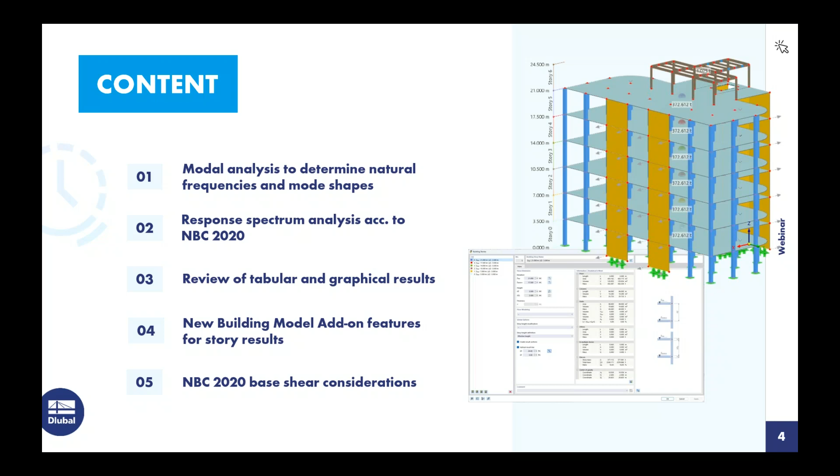So before we begin, I want to discuss the NBC 2020 earthquake methods of analysis that are given in Article 4.1.8.7. So we do have the equivalent static force procedure that is provided in 4.1.8.11, and this is certainly a simplified approach for seismic design. Now, this can be applied for buildings that are of seismic category SC1 or SC2, given in Table 4.1.8.5-B.

It also can be applied to regular structures with a height less than 60 meters and a fundamental lateral period less than 2 seconds. We can also apply this simplified approach for irregular structures, and we would refer to Table 4.1.8.6 to see what categorizes a structure as irregular. But the height must be less than 20 meters, and that fundamental lateral period must be less than 0.5 seconds.

Then we have the dynamic analysis procedure in 4.1.8.12, and this includes the response spectrum method, the time history method, or the nonlinear dynamic analysis. And this should really be applied to all structures that do not satisfy the simplified requirements set forth in Article 4.1.8.7. For today, we'll move forward with the response spectrum method for our structure.

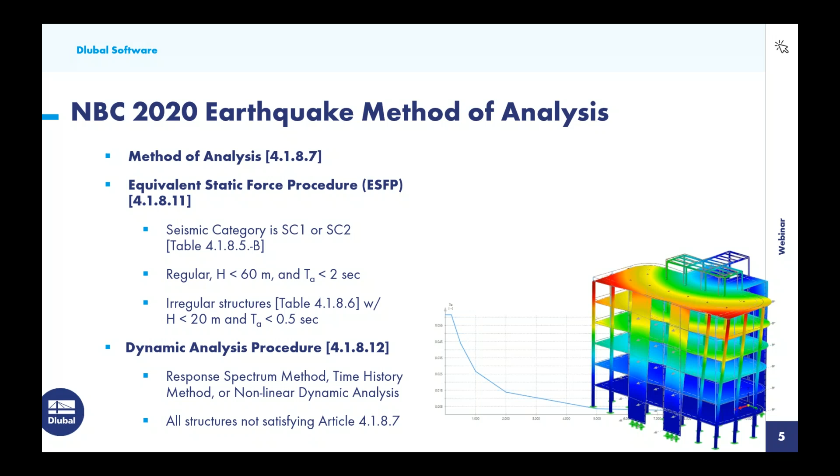So we'll begin in RFEM here, where I have already modeled our multi-level story structure. So we'll quickly go over a bit of the model input as shown over here in the RFEM 6 navigator on the left. So we can see our input materials, and a majority of the structure is defined here as a concrete material with a compressive strength of 40 MPa. But we also have a small steel structure up at the roof level here with a material of A992 steel.

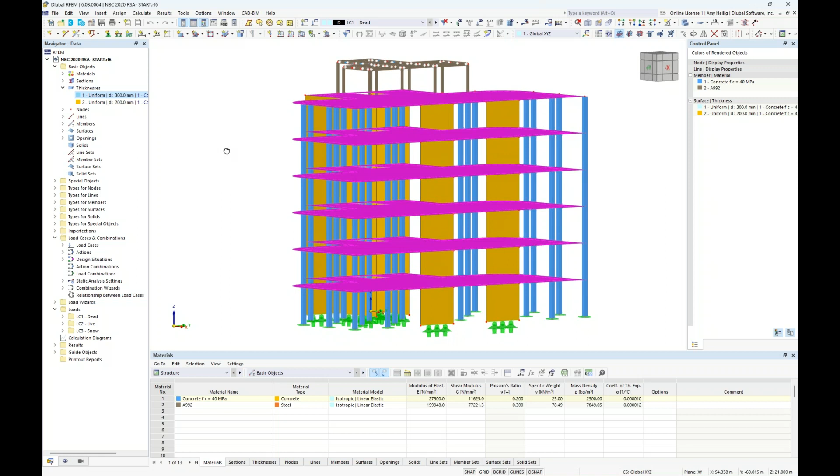As far as our cross sections, you'll notice that our concrete columns that are spanning between floors are just going to be square 350 millimeter by 350 millimeter concrete rectangular sections. And then as far as our steel members, we have several W shapes defined directly from the RFEM 6 CSA library. And finally, we have the thicknesses defined of our surfaces. So this would include our floor slabs here, which are defined with a 300 millimeter thickness. And then we have the thickness of all of our shear walls, which are going to be defined with a slightly smaller thickness of 200 millimeters.

So that's just a basic overview of the structure, but we would also like to take a quick look at the applied loading that, again, I've already added to this particular model. So within our dropdown, we have three simple load cases, all gravity loads. The first is going to be our dead load, and this is going to be a surface area load of 3.5 kilonewtons per meter squared applied at every level.

We also have a live load, with a modified magnitude here of 2 kilonewtons per meter squared, again applied at every floor level. And finally, we have just a general snow load at the top level here of 1.5 kilonewtons per meter squared. So now that we have reviewed the overall structure and the loading, we want to move forward now with our modal analysis.

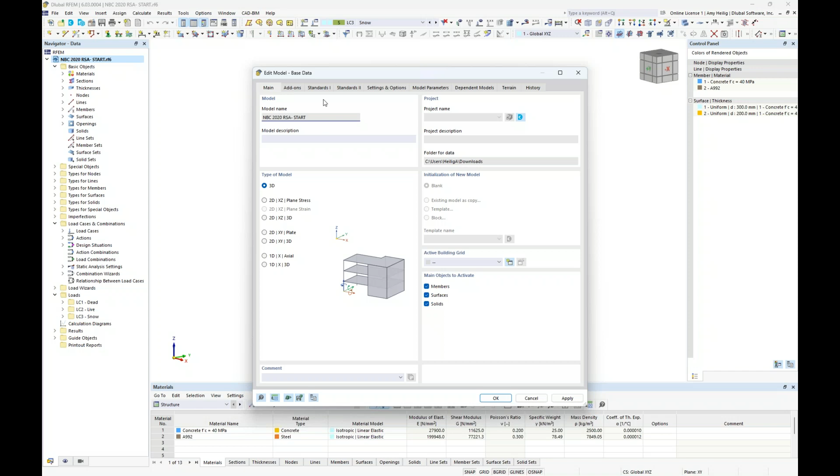So we want to right-click on the model name here in the Project Navigator to visit what's called the Base Data dialog box. And this dialog box would be presented to you when you first create a new model within RFEM. But on the second tab are all of our optional add-ons.

So to quickly explain the configuration of RFEM, the base program itself allows us to fully model the structure, including all of the materials and cross sections from the library. We can apply loads and run a basic static analysis.

But the minute we want to move forward with design according to the various standards, we would activate one of these add-ons, for example, concrete design, steel design, timber design, and so on. And in particular, today, we want to activate our dynamic analysis add-ons, and we'll begin with the modal analysis.

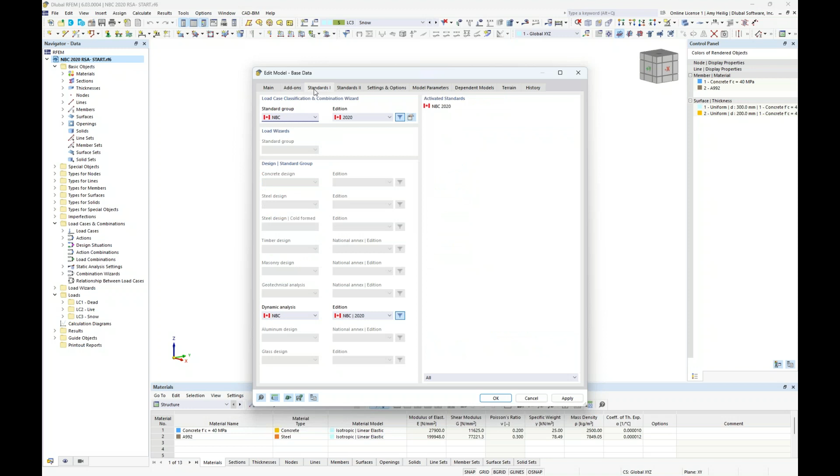So on the third tab, we will generate our load combinations automatically according to the NBC 2020, but we see all of the relevant international standards that are available in the base program as well. And because we have activated now that dynamic analysis add-on, we will go ahead and reference the NBC 2020 here.

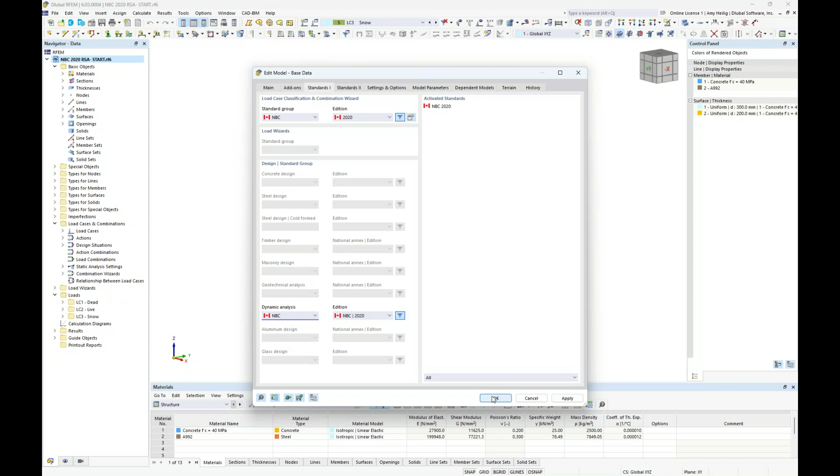So once we have activated that add-on, we will go back into the program and we want to visit our load cases and combinations dialog box. Well, we can immediately pull that up here by editing the active load case. And again, under the load cases tab, we see those 3 simple load cases that we just reviewed, dead, live, and snow, but we're going to create a 4th load case. And the load case name is going to be modal analysis.

Now, because we have activated that add-on, you will notice here that within the dropdown, we now have a new analysis type called modal analysis. And this is only available because we have activated that add-on. So you'll also see a lot of these settings immediately modify in comparison to the static analysis.

The first thing to take a look at is the modal analysis settings. So we'll go into the edit dialog box here and we have a couple default options. The first input is the method for determining the number of modes. So this is by default set to user defined, where we can directly put in the number of mode shapes we would like to solve for. And for today, I'm going to increase this to 10, but you can solve for 10, 20, 50, 100 different modes if you prefer.

The alternative method in this dropdown is automatic to reach a maximum natural frequency. So you'll notice that we can input in the maximum natural frequency and the program will determine the number of modes needed to reach that particular value.

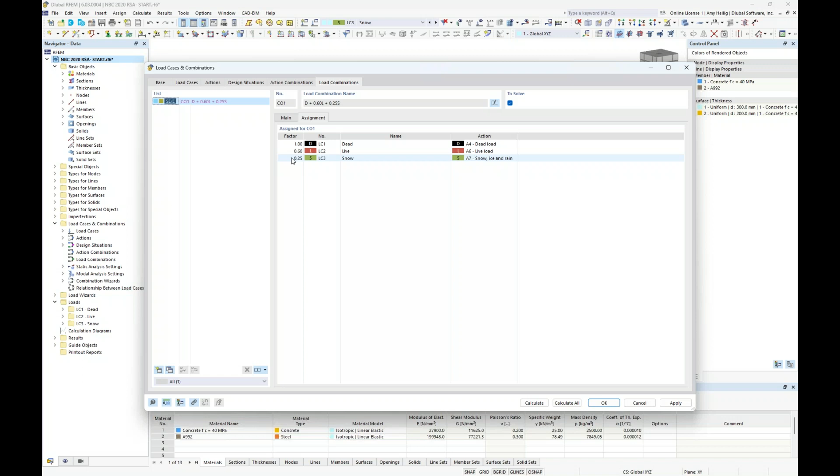And now when we jump to the load combinations, we will see all three load cases considered with the relevant factors directly from the NBC. So 100% of the dead, 60% of the live, and 25% of the snow. So jumping back to our load cases and under the modal analysis, we can now use our drop-down box here to select that mass combination. So now these relevant load cases will be converted to mass.

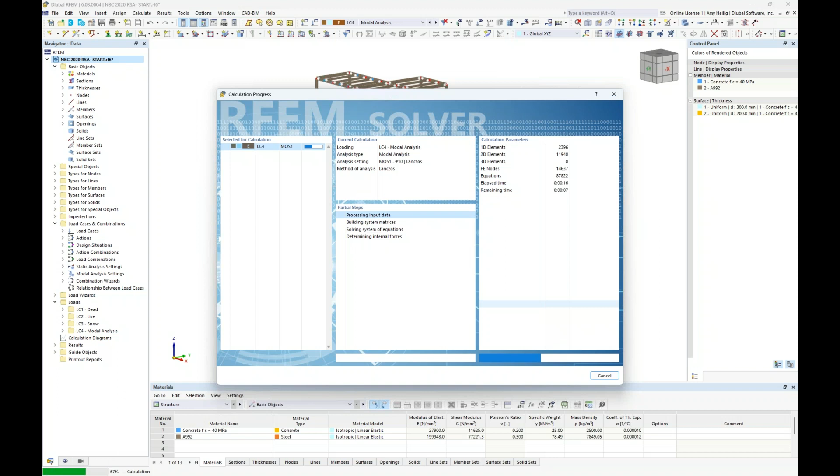Okay, we're now ready to run the calculation, so we can simply hit calculate under this particular load case modal analysis. The program will generate our FE mesh for us. And we are going to calculate a total of 10 different mode shapes. Remember, this is the input that we have input into the particular modal analysis settings. We will also consider the mass conversion of the particular mass combination that we have also set. So when that calculation is done running, we can take a look at our results.

And over on the left, we now have a fourth tab available in the navigator. And within our dropdown, we see here 10 different mode shapes that we can actually cycle through to see the response here of the structure. So currently we're viewing the mode shape, and notice at the very bottom here, we have the ability to scale the mode shapes. Now the default option is set here so that the magnitude of the mode shape vector is set to a value of 1.0. That's why we see a max value here of 1.0.

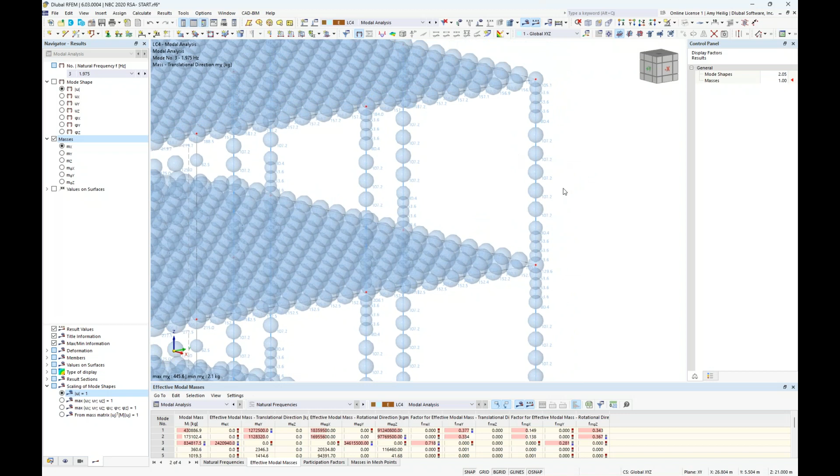But there are some different options we can easily toggle to if we prefer, but most likely we'll be utilizing this first option. So in addition to viewing the mode shape here, you'll also notice the ability to take a look at the masses on the structure used for this modal analysis. And if I zoom in here, we can actually see the mass magnitude at every single FE mesh point that was used in this calculation for our members, our floor slabs, and also our shear walls.

So in addition to the graphical output, we certainly want to visit the tabular output here. So once this calculation is complete, we should also see the ability within our dropdown to jump to the modal analysis add-on to view our results here. And the first tab under the natural frequencies includes those 10 different mode shapes as well. So we can cycle through these by clicking in the table, and notice the graphics will automatically update.

But this allows us to view the angular frequency, the natural frequency, and the natural period of our structure for those 10 different modes. Now, it's really important to also take a look at the effective modal masses. And within this is going to show us our mass participation for each mode shape. Well, we can immediately tell what our dominant modes are here, just based on the most mass participation. So mode shape 1 would be our dominant mode in the Y direction. And we can also view mode shape 3 here, which would be our dominant mode in the X direction.

And down at the bottom of this table, we will actually get a summation here of the mass participation. So in the X direction, we have 72%, and in the Y direction, we have 89%. Well, if we refer to the NBC commentary, and currently only the 2015 is released, we don't have access yet to the 2020, but I would imagine it would say the same thing, in that a 90% mass participation is required for this modal analysis. And we're certainly not reaching that with these 10 different mode shapes here.

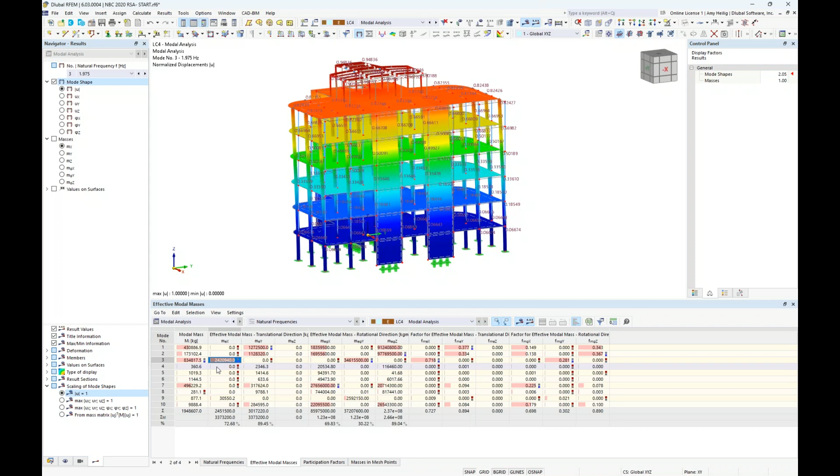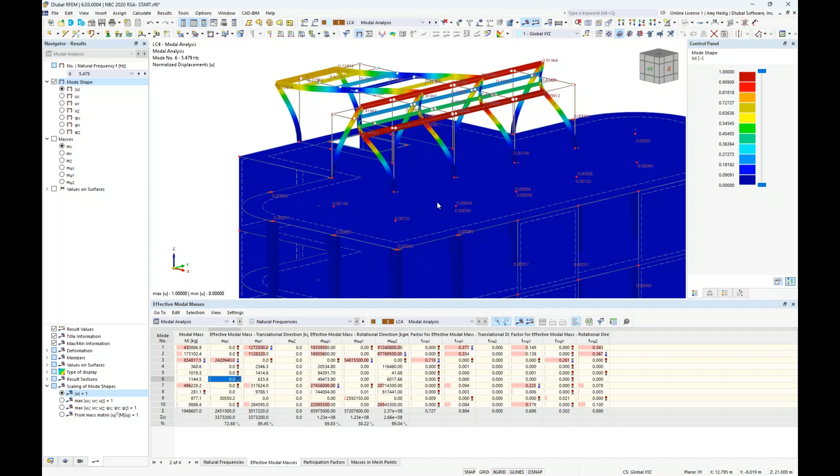Alternatively, if we take a look here at mode shape number 4, for example, you'll notice that really not much is going on with a majority of the structure. Rather, we're seeing a response up here for these smaller steel members only. Same concept with mode shape number 5 and mode shape number 6. So we term these usually as local modes, where again, not much mass participation, but we're seeing very little response for just maybe a few members. So I'd really like to eliminate these local modes in my calculation.

And we're going to go back to the modal analysis here and revisit these settings. Under the Settings tab, remember we have this currently set to no neglection, but what I would like to modify this to is user defined, where I now have an additional third tab here to neglect masses of a particular object that I select within this dropdown. And for today, I'm going to deactivate the masses for all of my steel members located at that top level.

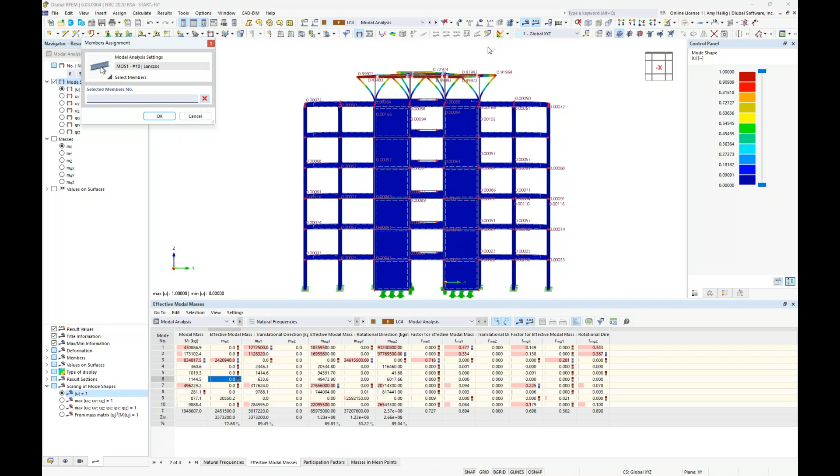And I can graphically select the steel members here. I'll turn off my results. Maybe I turn this into a rendered view by graphically using my selection box here to highlight all of the steel members. Now notice the member numbers are automatically populated. So now we're going to completely neglect the masses for those particular elements. But if we would still like to consider the masses and maybe just redistribute to a different area of the structure, we can do so.

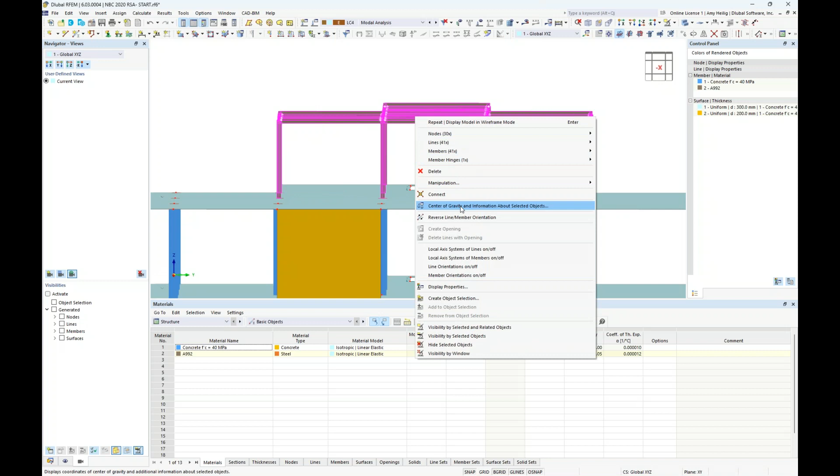So if I highlight all of these same members, again, these steel elements up at the top, I can right click to take advantage of this option here called center of gravity and information about selected objects. And what you will notice is that the program will give me the total mass here of the selected objects, 3.075 tons. Well, I can take this a step further to generate a new node at the center of gravity with the selected objects, and we see that generated here in the background.

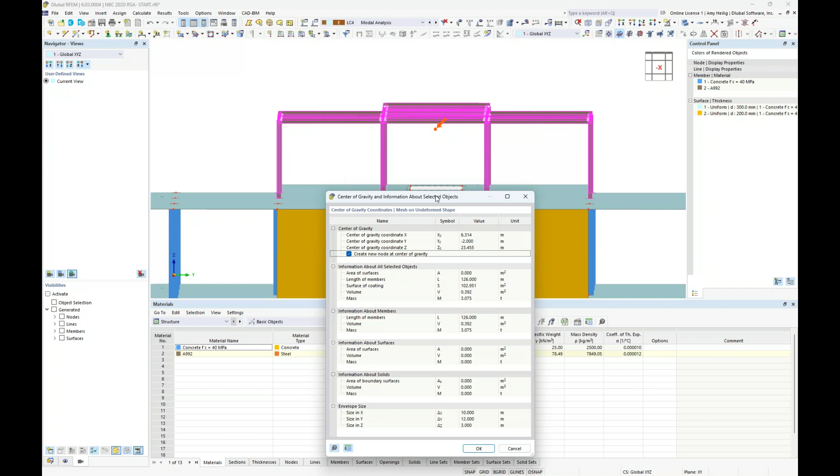So once I've created that additional node, I'm actually going to double click on it because I want to modify the Z elevation here to 21 meters. And by doing so, I have simply moved this node to the top story here of the concrete structure itself.

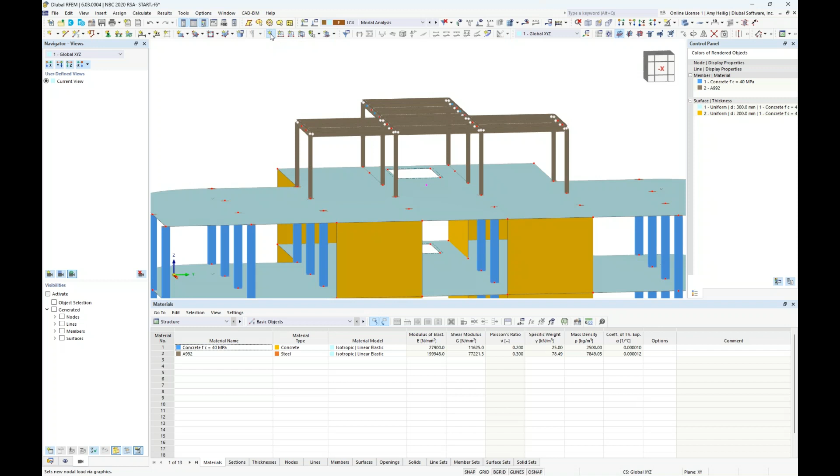Well, now we are going to apply a new nodal load. So I choose my option directly up here in my quick tools up at the top. And instead of the load type set to the standard force, we do have the ability to set a mass load type. And again, taking into consideration the total mass of those selected steel objects, I'm going to simply redistribute it here at 3.075 tons.

And I'm going to apply it to node number 491, or we could graphically select that node. But we do need to make sure that we are under the relevant load case here. So we want to apply that to the dead load case. So when I click OK, the program asks me to delete the results, and we turn this into a rendered view here. And now we see that mass load applied directly to that node, again, at that top slab here

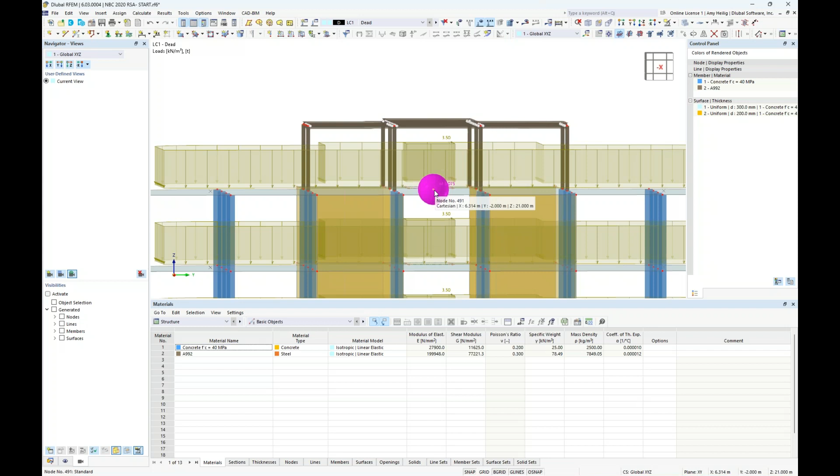of our concrete structure. So we have the ability to apply mass loading as nodal loads, as we just saw, or line loads, member loads, or surface loads to be considered further within the modal analysis directly. So we jump back down here to the modal analysis.

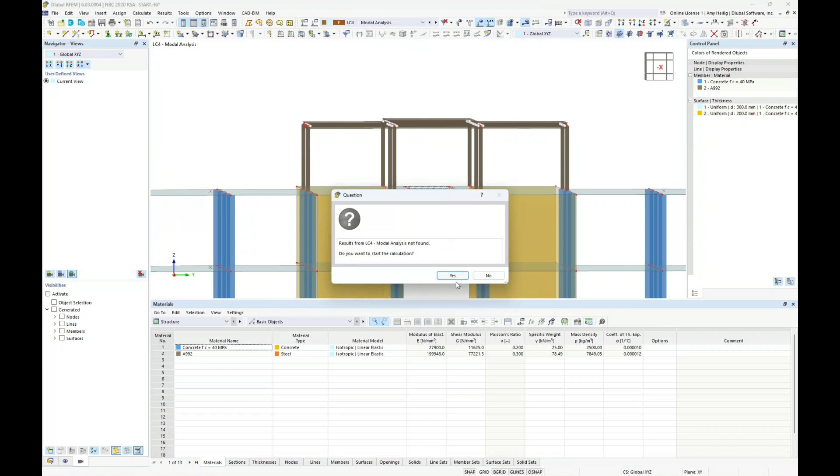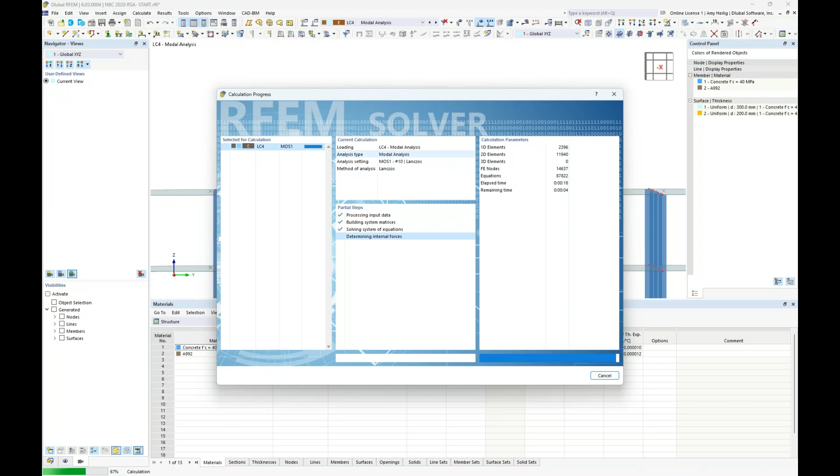We're going to rerun this calculation, and remember now that we are completely neglecting the masses from the steel members, but rather we have now inserted in that single point mass load at the top of the concrete structure to simply redistribute the mass. And our hope is by still solving for 10 different eigenvalues that we see slightly better mass participation.

So once the results are finished here, we can go ahead and zoom out to see the overall structure. We're currently looking at the modal analysis add-on and the effective modal masses tab. And we take a look at the bottom here for the summation of the mass participation. And now we have 96% in the X direction and 96% in the Y.

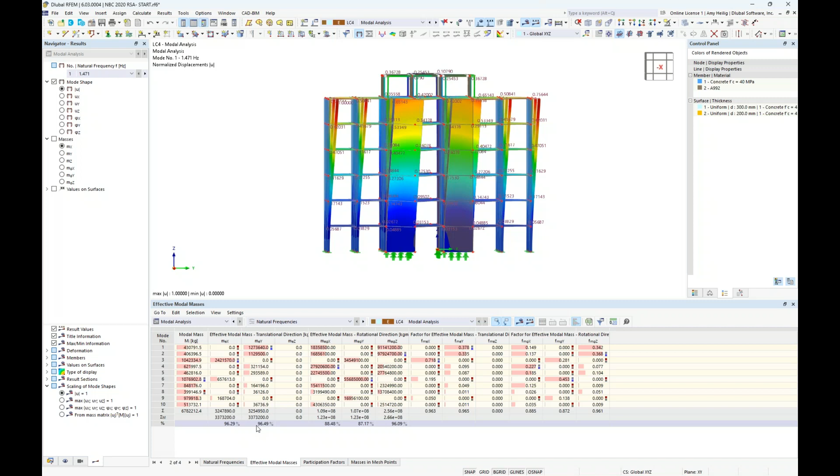So you can see by eliminating those local modes, we don't need to solve for more eigenvalues, but rather what we see here for mode number 4 and mode number 5, that previously had not a whole lot going on for the rest of the structure, actually look quite good now with a response of the overall structure instead.

Okay, so now that our modal analysis is complete, we have met those 90% mass participation requirements set forth by the NBC. We want to move forward with a response spectrum analysis. So we will go back to the navigator and the first tab here to revisit our base data dialog box.

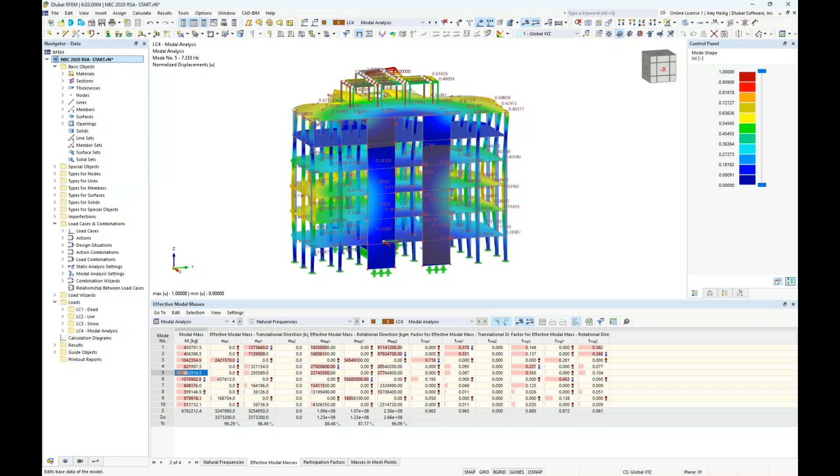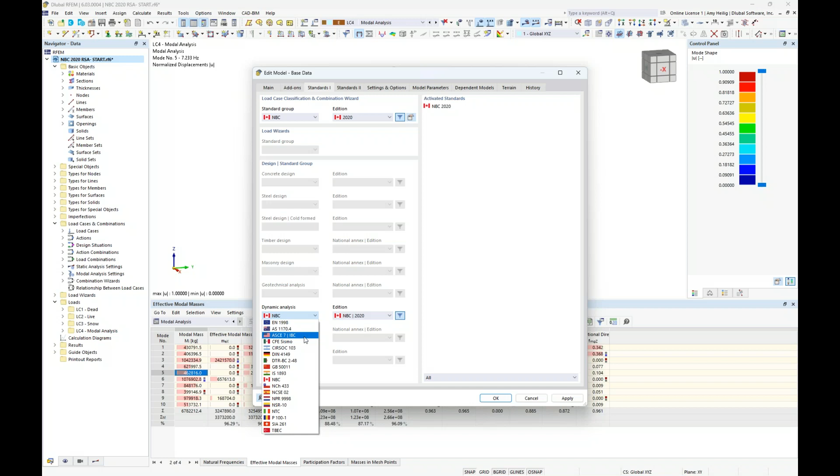And under the add-ons, you can see that we also have the ability to activate our second add-on, response spectrum analysis. And under the standards, we're making no modifications here. We're still running that response spectrum analysis according to the NBC 2020, but I just wanted to point out all of the other international standards that we have available, including the ASCE 7, the Eurocode, and several other international standards.

So we'll go ahead and click OK to get back here within the model where we will revisit our load cases and combinations dialog box. So we will create a fifth load case here, and this one is going to be called RSA for Response Spectrum Analysis Design. Within our drop-down box, we now have a third option available to us, the response spectrum analysis.

Now, before I get into some of these settings here on this first tab, I'm going to go ahead and go over the additional tabs. As far as additional settings, this is actually not something that you need to worry about with a response spectrum analysis. With that dynamic add-on, it's really more relevant for a static analysis. So we'll go ahead and make no changes here.

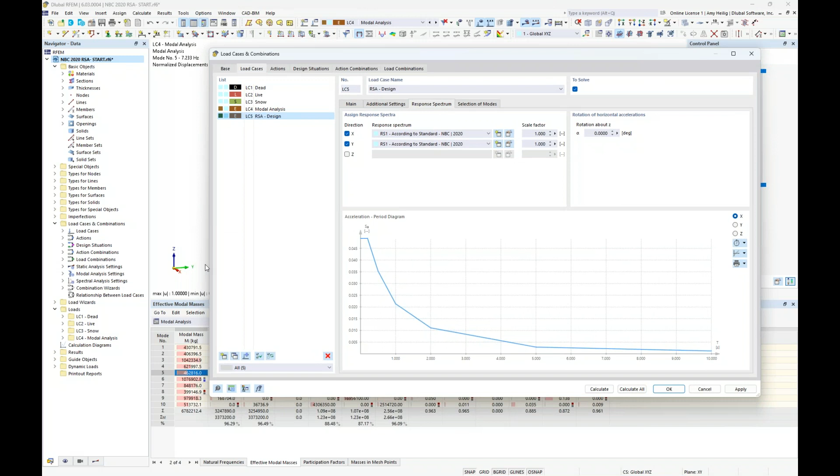Under the response spectrum, we are interested in applying this response spectrum in the orthogonal X and Y directions. And this is just based on these global axes here in the background of the RFEM model directly. Now, of course, if we were also interested in a vertical seismic response spectrum, we would activate in the Z direction as well.

The program has automatically set a response spectrum definition type here according to the NBC 2020, but we can go ahead and edit the settings within this particular definition type. So as far as generating this response spectrum, we have several options within the dropdown.

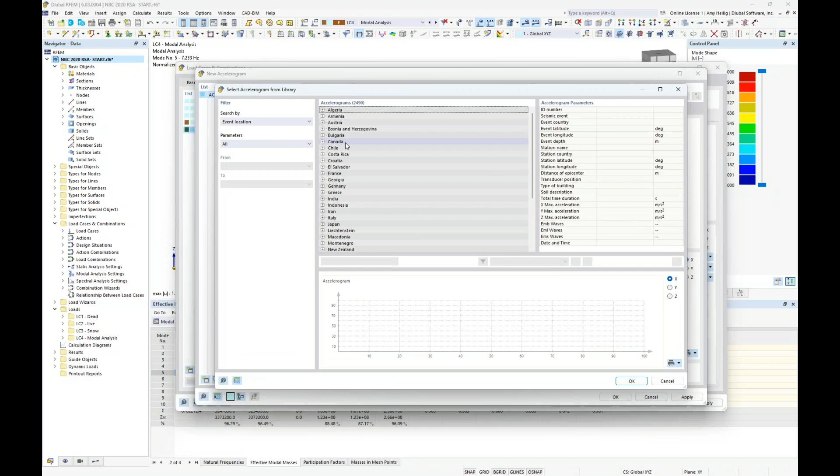The first is with a user define, where notice that you can input directly the period, the frequency, the acceleration, and this diagram will be automatically created based on this input. Alternatively, we have the ability to consider from an accelerogram. So with the accelerogram, we can take a look at the RFEM library directly, where we have several recorded earthquake events from all the various countries, including Canada here.

So we could select one of these particular accelerograms to be considered for our response spectrum analysis. Now, finally, the last option here is according to the NBC 2020, which is what we'll be moving forward with today. Now, it's very important to note here that under the spectrum type, we have two options, the elastic and the design. We'll actually touch on this at the end of the presentation today, but for now, we want to choose the design spectrum. And once we have set the spectrum type, we do need to input several variables here, including the spectral response acceleration for the various periods.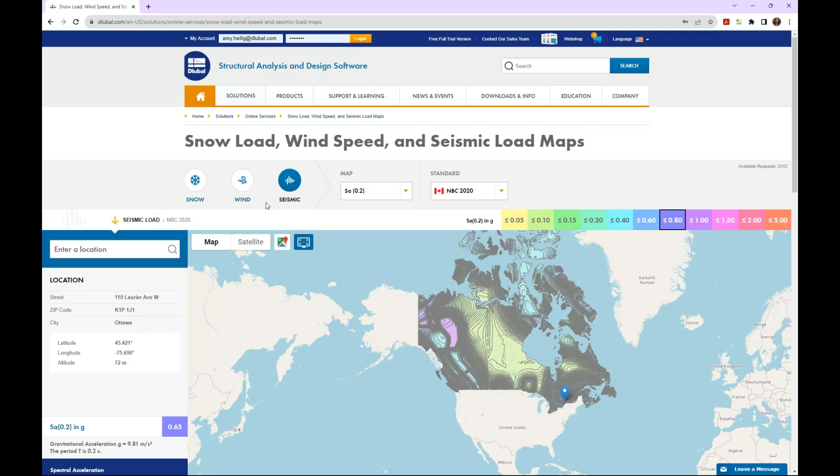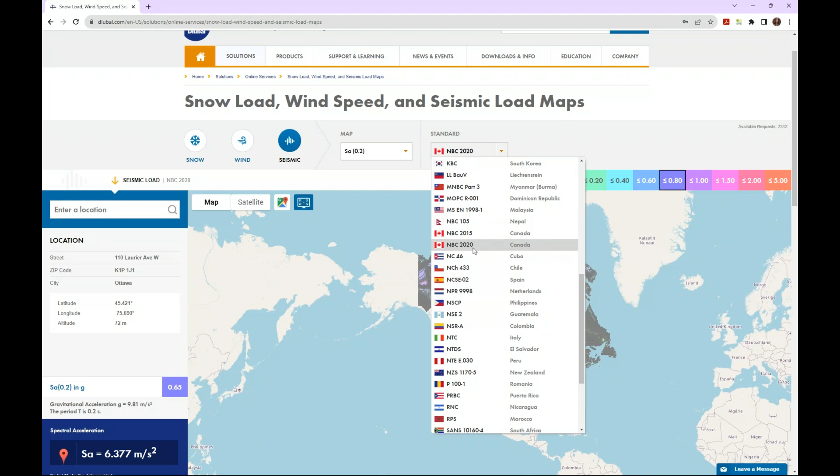Well, I wanted to point out that if you do visit our website at dlubal.com, under solutions, we have here what's called the snow, wind, and seismic load maps, or in other words, our Geo-Zone tool. So you can see the various hazards that we can select at the top here. And for today, I have selected the seismic. And we also have implemented multiple standards from around the world, including the ASCE 7, of course, the NBC 2020, and all of the rest of the standards available here.

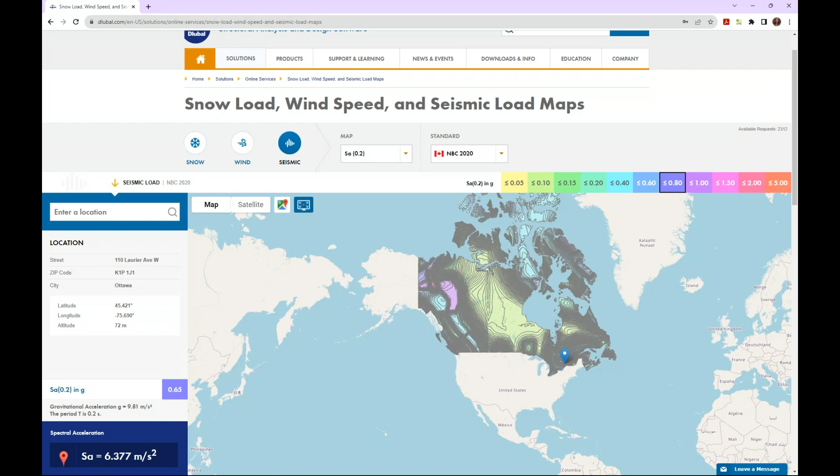So once we have selected our standard, this is also integrated with Google Maps technology in the sense that you can simply input your project location, such as an address or perhaps a city. You can go ahead and select as well within the drop-down these several options that are needed for a response spectrum analysis, and the program will instantaneously return the correct information to you, again, based on the NBC. So maybe a little bit more efficient than flipping through maps. So certainly take a look at this Geo-Zone tool available on our website.

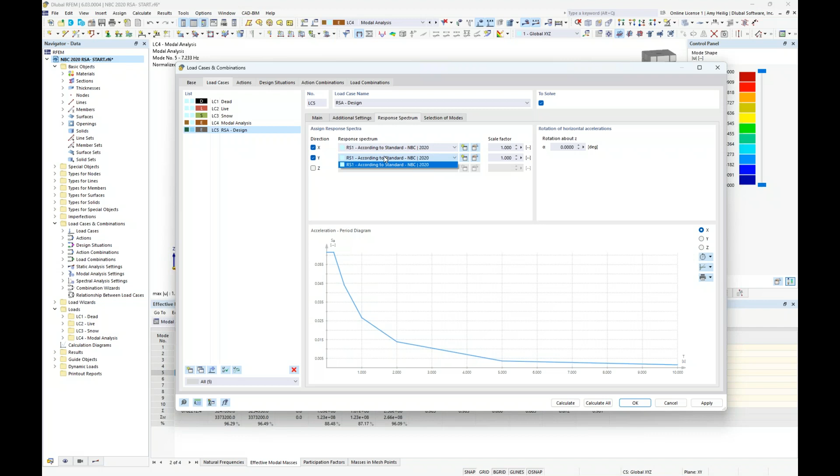So we go ahead and click OK, and we want to ensure that that response spectrum is applied in both the X and the Y directions within this dropdown. The final tab here is the selection of modes. So what you'll see listed are the 10 different eigenvalues that we solve for from the modal analysis. And what's nice is that we also get a nice summary here of the mass participation in the X and Y directions. So 96% in both the X and the Y directions, as we have already taken a look at the previous results back in RFEM.

Well, if we are interested in deactivating some of these mode shapes with very little mass participation, so for example, if we set this to 4%, notice that a couple of these modes are deactivated, yet we can still double check to make sure that we're still meeting this 90% requirement, and sure enough, 96% in the X and now 94% in the Y. Well, this just allows us to maybe speed up our calculation quite a bit without having to worry about some of these mode shapes that are not contributing much to the mass participation of the overall structure. So in this case, modes number 8 and 10 will be unchecked here.

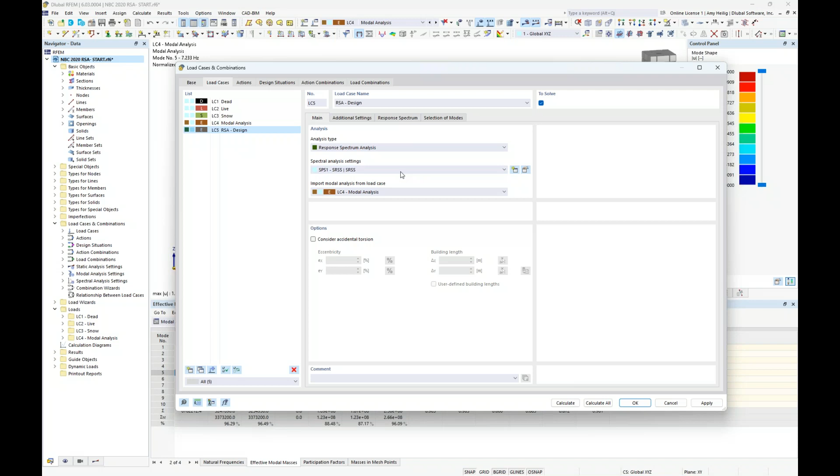So now that we are complete with these additional tabs up at the top, we go back to the main tab to talk about these spectral analysis settings. And again, by default, we do have a definition type set here. This will allow us to set the modal combination method for the periodic responses, and we have 3 different options available. We can take into consideration damping for the CQC rule, and we also will need to set the combination of the directional components, again with 3 different options available here.

So this is a really important topic, therefore I'm going to jump back to the PowerPoint to explain this in more detail. So we'll begin first with the modal combination method, and that's that first drop down available to us. So I'm going to jump ahead here in this PowerPoint to what you would ultimately see in your result output once we do run this response spectrum analysis. So remember that we're solving for 10 different mode shapes, or maybe we've deactivated a couple of those.

So we're going to apply this response spectra analysis in both the X and the Y directions for all mode shapes selected. However, we need to somehow combine these so that we get a single response in the direction X and a single response in the direction Y. And within this dropdown, we choose the method of how these will be combined.

The first is going to be the square root sum of the squares, the SRSS rule. And this is where we're going to combine the max results by squaring them, adding them together, and taking the square root. Of course, you'll notice that when we do this, we will lose the signage.

The second option looks very similar here, but you'll notice that we have an additional coefficient epsilon that's included within this equation, and this is the correlation coefficient. The equation for epsilon is shown here, and the big difference between the CQC and the SRSS is we have the ability to consider damping.

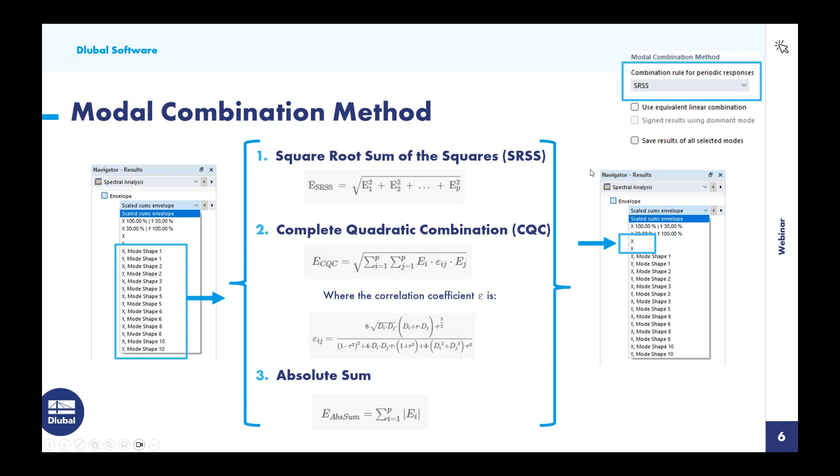So the standard SRSS and CQC combinations, those first 2 methods that we were talking about, inevitably we're going to lose the corresponding internal forces. And what I mean by this is that if we take a look at, for example, a column's max axial force, we'll lose the corresponding moment in the results when we combine these. This is why we have an additional checkbox option right below this called the equivalent linear combination. And this will essentially give us a more realistic result as well as the correct signage.

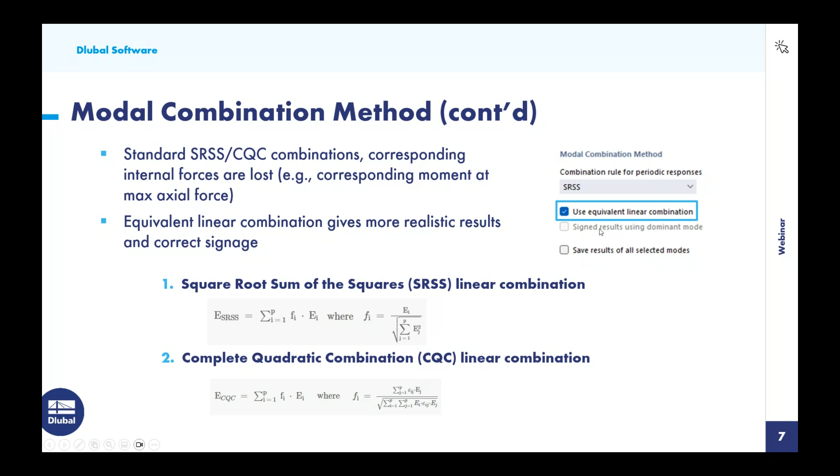So taking a look at the square root sum of the squares, SRSS, with this option checked, we see the modified equation shown here. Very similar, we have the CQC with the linear combination checked. Again, we'll see how these formulas vary slightly from the formulas shown on the previous page without the equivalent linear combination activated.

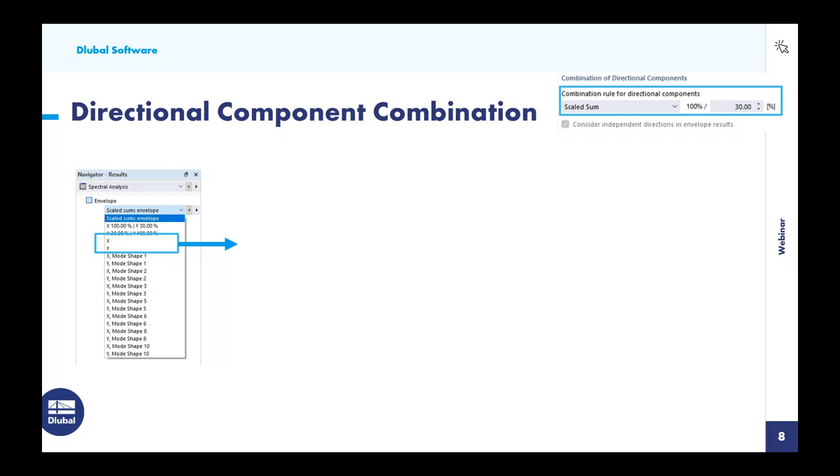And finally, we have our final dropdown within these options for the directional component combination. Well, we now have a single response in the X and a single response in the Y, but we know that earthquake loads don't necessarily always act 100% in the X direction of our structure or 100% in the Y direction, but rather it's usually a combination of both. So the question is, well, how are we going to further combine these for our eventual design of the structure? And again, we have three different options here.

The first is going to be the SRSS rule once again, where we square them, take the sum, and then take the square root. The second option, and probably the more common approach if we are designing to standards such as the NBC, is the scaled sum or the 130% rule. This is where we are going to consider these independent directions, but we're going to take 100% of the X and add it to 30% of the Y. Now, if we were also considering a vertical seismic in the Z, we would additionally add 30% in the Z. And we'll create a second result here with 30% in the X plus 100% in the Y.

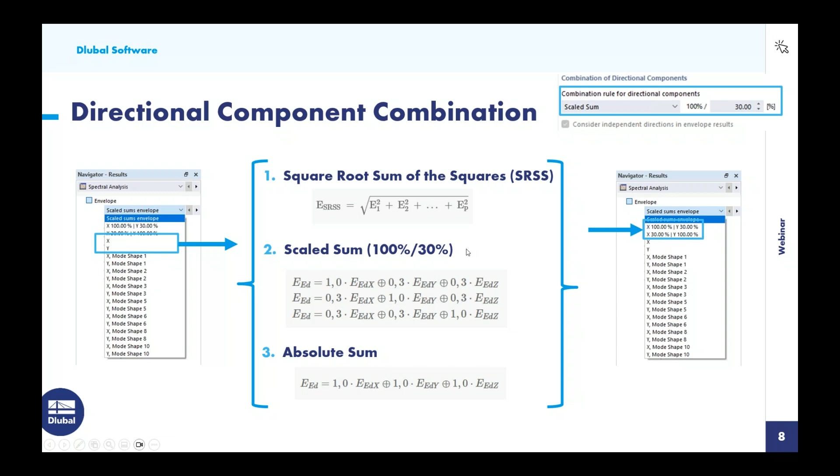Now, the final option for this method is the absolute sum, and this is just simply where we are going to add 100% of the X to 100% of the Y and possibly 100% of the Z. So again, the most conservative approach there. But assuming we move forward with the 130% rule, which is exactly what the NBC calls out if we refer to Article 4.1.8.8.1(c), we should see two results further output in our results for the response spectrum analysis, exactly as we just discussed here, in both orthogonal directions.

Okay, so let us go back to RFEM yet again to choose the combination rule here. Just notice that when we have the CQC selected, we now have the ability to set that damping ratio here on the right-hand side. But today we'll move forward with the SRSS with the equivalent linear combination.

Now, the signed results using the dominant mode, this is currently grayed out. We determined that with the way that the response spectrum analysis is carried out, there could be options or results that are unconservative if we were to apply this method here. So instead, in the near future, what we plan to do is to explore the option of exporting out the equivalent loads from the seismic response, and then we could certainly take advantage of options such as this for the signed results. But for now, you'll see that disabled.

The saved results of all selected modes. Remember, we're combining all of our mode shapes in the X and Y direction according to the SRSS. This just simply allows us to view the structure's results, including deformations and internal forces for each mode shape as well.

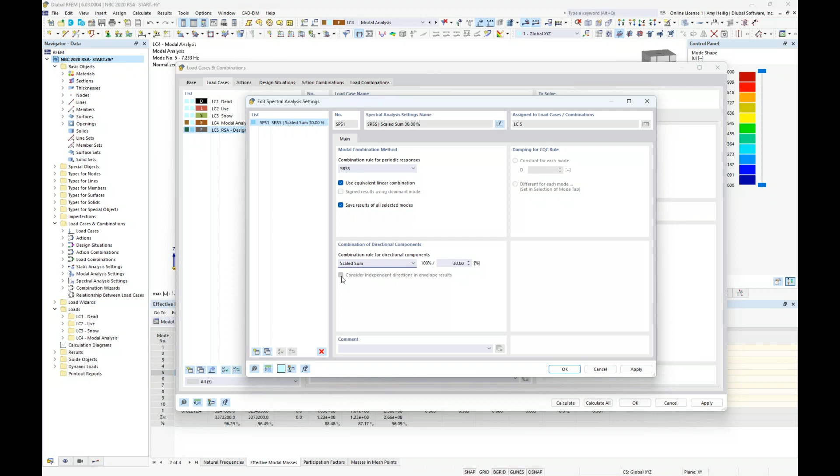For the combination of directional components, as mentioned, we will refer to the NBC to set that 130% rule. You see a checkbox activated here in the background. This just means that ultimately in our results, we will give you an envelope solution. So the max and min results for the 130% rule, but we will also consider 100% in the X and 100% in the Y in those envelope results as well. So this is checked by default.

So once we have set this information under these particular settings, we want to import in the modal analysis from the load case. Well, we've only run one modal analysis for today under load case 4, but we could create multiple load cases for different modal analyses. Why this might be beneficial is if we were making some experimentations with different mass combinations, neglecting masses, or whatever it may be, we would have the ability here to select a different modal analysis.

And finally, we have the consider accidental torsion. For this, we refer to the NBC article 4.1.8.12.4 that tells us we do need to consider accidental torsion in our response spectrum analysis. And we do so by setting here 10% in both the X and the Y directions. This is based on the building length in both of these orthogonal directions. Notice the program automatically calculates what this building length is, but if we would like to override that, we could certainly do so. Essentially, internally with our response spectrum analysis results, an additional moment will be applied at every single FE mesh point to consider those code requirements.

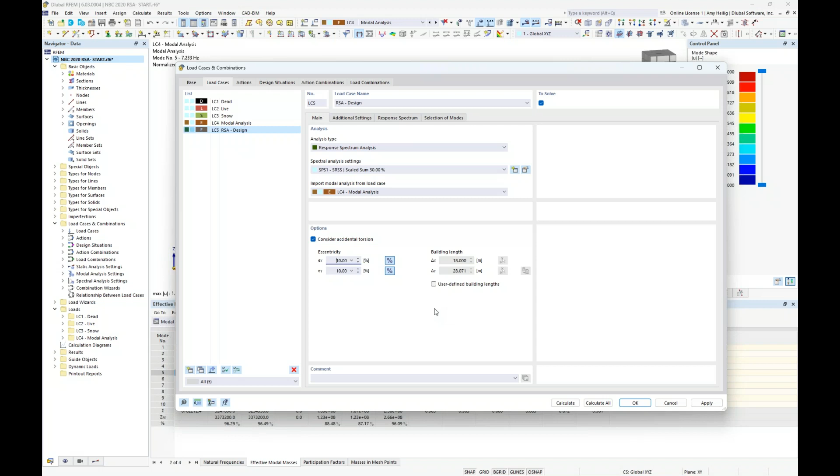So we are now ready to run our calculation once again. You'll notice here that we have several input options that it's solving for load case 5 here for that response spectrum analysis. This is simply because we are considering all of the 10 different mode shapes, except for the 2, of course, that we deactivated, in both the X and the Y direction, applying that response spectrum analysis to each mode shape, and then combining according to the relevant settings that we just discussed within the PowerPoint.

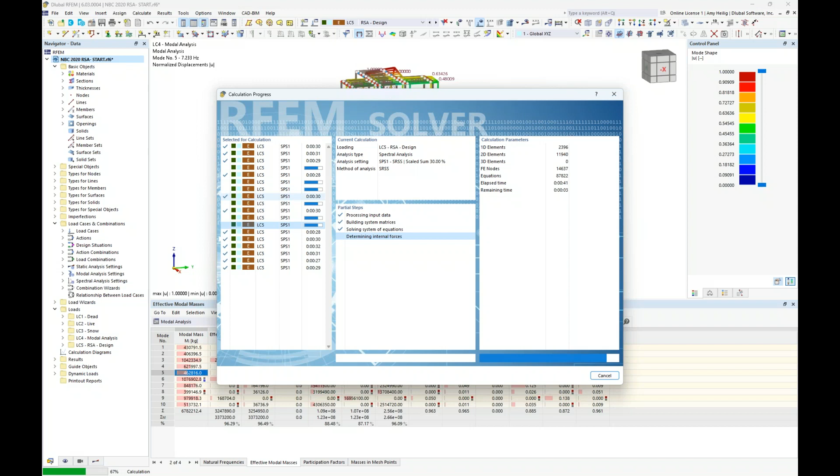What else is new within RFEM 6? You'll notice that these are being solved simultaneously, taking advantage of the multi-core processor within your computer. Previously in RFEM 5, it would require each of these calculations to be run one by one.

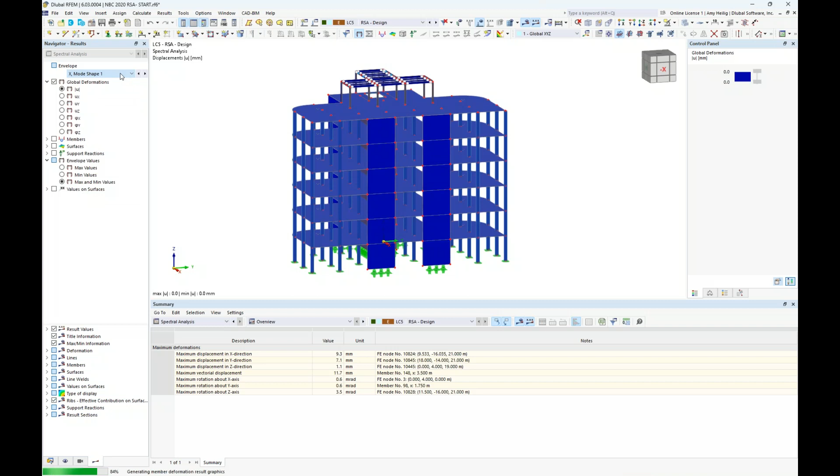So now that the calculation is complete for the response spectrum analysis, we will jump yet again to our navigator here to this 4th tab where we see our results within this dropdown. Just like what we were discussing within the PowerPoint, we have all of the various results here for the individual mode shapes in both the X and the Y directions, but we also have 100% in the X, 100% in the Y, and we have the combined 130%. And finally, we have the scaled sums envelope, and this is going to be that envelope solution that includes the 130% rule, but also 100% in the X and Y.

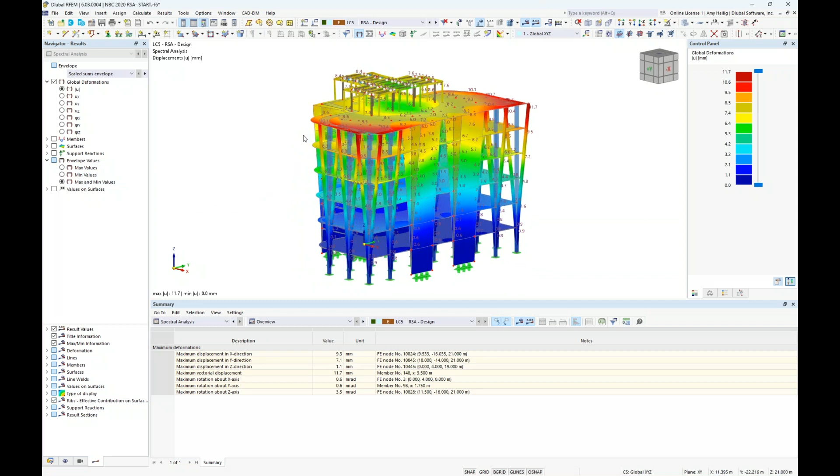You can see the envelope values can be activated here. Currently, we're looking at the max and min values. That's why we kind of see duplicate results here for our deformation, but we could set this to the max values only or the min values only, or keep this as both. In addition to the global deformations of the structure, we can also view information such as the member internal forces. So perhaps I change this to the max values only, and I'll change this to wireframe view.

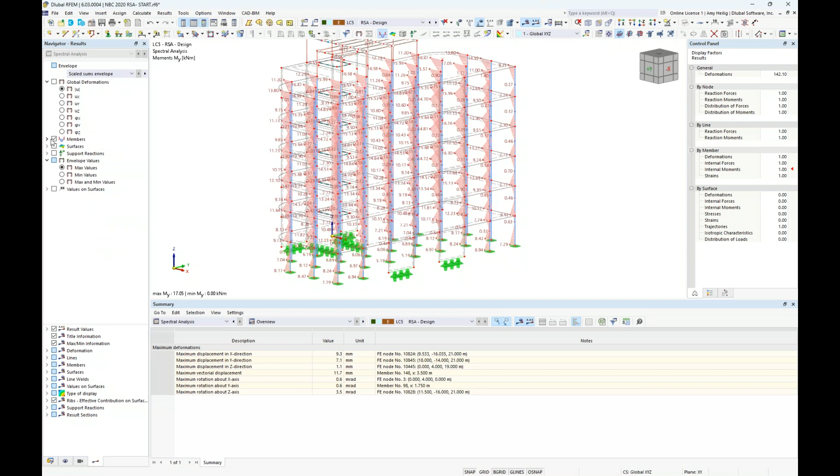We can view the maximum axial forces in our columns from our response spectrum analysis, or the shear forces or bending moments. Same concept here for our surfaces. We can activate the bending moments. We can also activate the color navigator over here. We can take a look at shear forces or those normal forces within the structure for those particular surfaces.

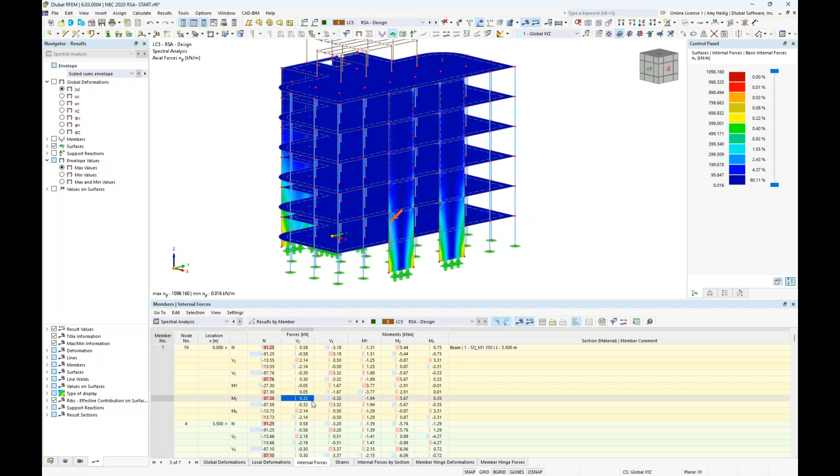Now, all this information shown graphically is also available in table format, similar to our modal analysis, but this time we jump to the spectral analysis add-on, and we can view here the results by member. So information like those internal forces for each individual member, and we can go ahead and turn off our surfaces here. Notice that everything is synced up in the background to show me exactly which member I'm currently looking at. We can export this to Microsoft Excel if we're interested in further sorting capabilities. Same concept here for the results by the surfaces as well.

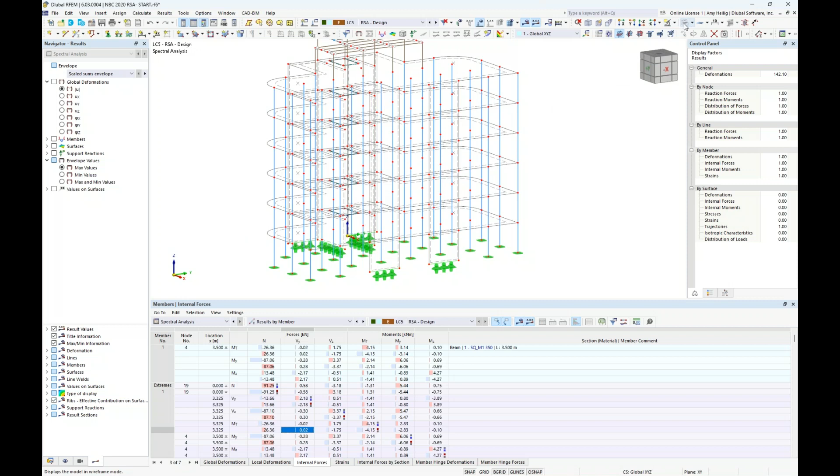So a very important result interpretation from the response spectrum analysis is, of course, the topic of base shear or story shear. And previously in RFEM 5, what we needed to do in order to get this information out of the program was to typically take one of these column stacks here to make a copy of it. Then we would move it over here to the side of the structure, change the member type to something called a result beam. And the result beam would then sum up all the internal forces here for all of the selected objects.

But now in RFEM 6, we actually have introduced a new add-on called the building model add-on to better organize this result output with the response spectrum analysis. So we'll go back here to our base data by right-clicking on the model name. And similar to what we saw here with our dynamic analysis add-ons, we can now activate the building model add-on.

So keep in mind that RFEM is a nonlinear general FEA program. This means that yes, of course, we can model, analyze, and design buildings, but we also can model domes or silos or fabric tensile structures, or maybe it's an FEA of a steel connection. All of these different model types are possible. So what we're hoping to do here with the building model is to integrate more of those building specific features within a general FEA program.

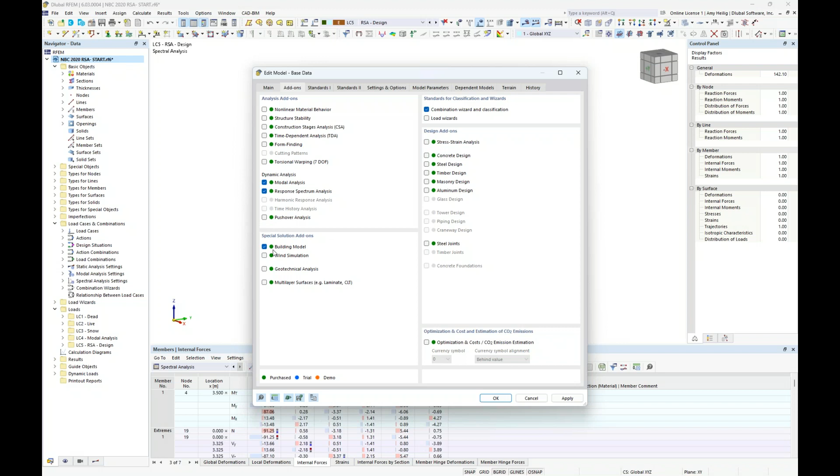And this includes topics like diaphragms, shear walls, spandrels, and I will refer you to the webinar that I presented last month on concrete design according to the CSA A23.3, which is on our website and our YouTube channel, where I actually go into a little bit more detail than what we have time for today with this building model add-on. But for today, we will go ahead and activate this here. And ultimately, what many other software companies are doing with two separate programs, with FEA as well as building specific, we're trying to integrate into a single program with RFEM.

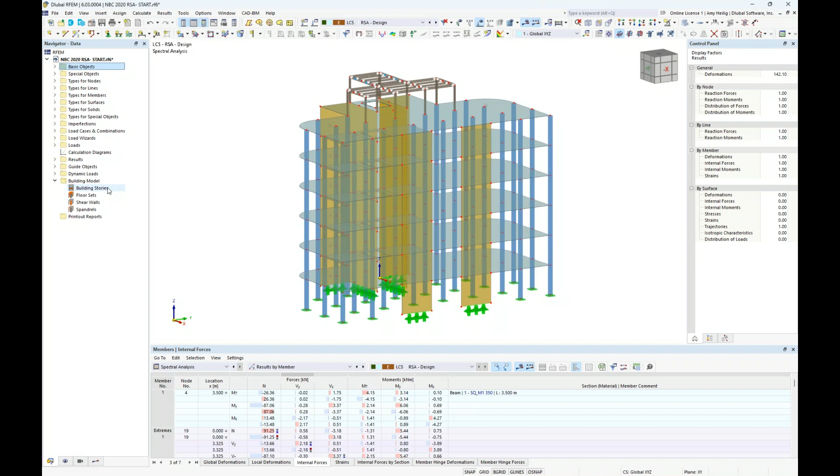Now, at first glance, it appears that not much has changed when we have activated that building model add-on, but I'm actually going to right-click here in one of my folders within my navigator to collapse all of them, just so it's a little bit easier for you to see that we now have a new folder option here called building model. And what we need to define are the various building stories for our structure today. And we do so by right-clicking to create a new building story. The first story is by default automatically created here, but we do need to tell the program what's the base of this story and what's the top of the story.

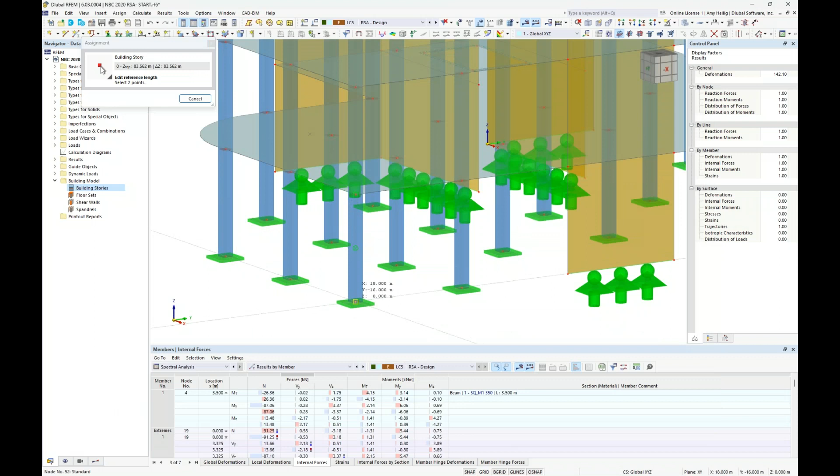And we can do so by graphically selecting 2 points. So I'll scroll down to the base of the structure to select this point at the bottom, and then my second click is going to be at this first story height. And actually, let me click that again. Looks like I had toggled to a different point. So we see a total height here of 3.5 meters. Now, I want to also point out that over on the right-hand side, we have a nice table format that includes all of the information such as area, the length, the volume, the mass for all of the objects at this particular story level only.

We also have the ability here to define a rigid diaphragm or a flexible diaphragm. Semi-rigid diaphragms are also currently in development and will be released at some point in the future. Now for today, we won't define any diaphragm. We're just going to keep this as the standard surfaces that we already have modeled in RFEM.

We want to continue adding the additional stories by doing so with our button in the lower left-hand corner here, all the way up to story number 6. So the program automatically assumes we have the same story height of 3.5 meters at each level. If you did need to modify that, you could certainly do so. But again, all of the relevant information for this particular story will be displayed on the right. And now when we click OK, if we zoom out here and we kind of rotate the model around, notice that we have a graphical output of each story level shown, clear up to including the steel structure up at the top.

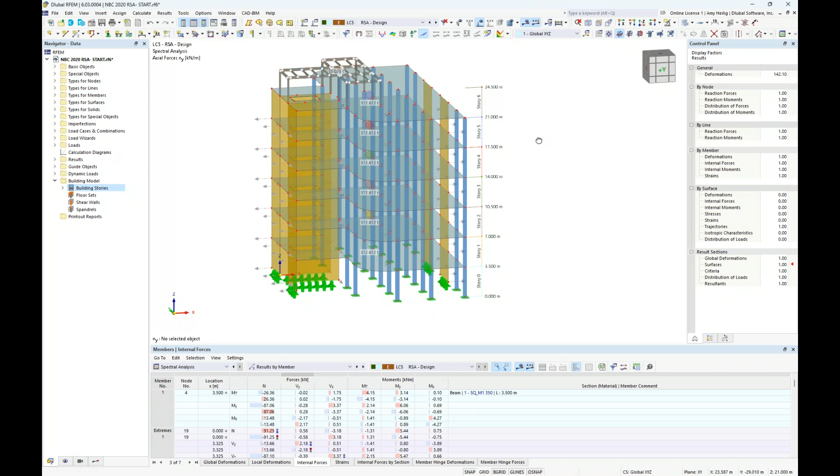So with the results from our response spectrum analysis, the only thing that we need to do here is to revisit our spectral analysis option within our first dropdown, but we now have a new result option called results by story. So I don't need to rerun the calculation. The program just automatically sums up the results that I already have.

And now we see under this first tab, probably the most important information related to that response spectra analysis is our story shear presented at each level. So we're seeing the max and min shear force in both the X and the Y direction, again, output at each story. You'll also see the location of the resultant story force shown here with that red arrow. And we would probably take a look at the base of our structure to determine what that base shear is, again, from that NBC response spectrum analysis.

The second tab is the interstory drifts, so we can view the drifts as well at each story level. Again, previously in RFEM 5, this information was a little bit more difficult to get out, but now in RFEM 6, with this building model output, we can directly see this based at each story level.

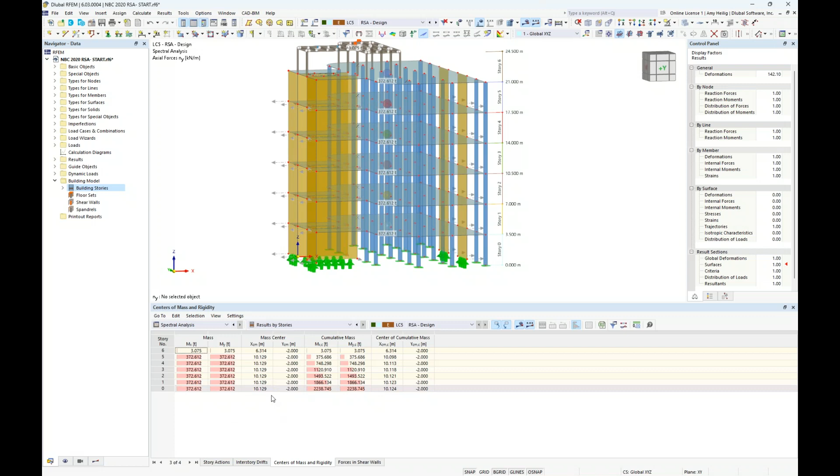The centers of mass and centers of rigidity are displayed here within table output under this third tab, so we can see centers of mass are actually also displayed here with these particular round circles shown here, or this mass ball at each particular level. Centers of rigidity would be available if we had rigid diaphragms defined, which we don't for this example.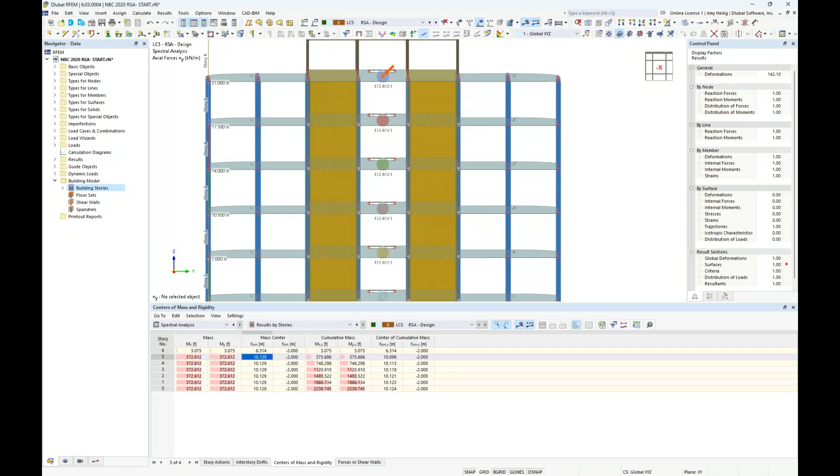And the final tab is the forces in shear walls. So we can actually sum up all of the internal forces for these vertical shear walls at each story level as well. So going back to the base shear, I want to switch back over to the PowerPoint to explain the requirements from the NBC 2020 when we are talking about base shear.

So let us begin with just a basic overview of some of the shear variables that are defined within the NBC. And we begin here in Article 4.1.8.12.5, where we can see that the elastic base shear from the dynamic analysis is denoted here with V sub E. So this is purely the base shear with no factors applied to it.

We then have the adjusted elastic base shear in 4.1.8.12.6, and this is V sub ED. Well, this adjusted elastic base shear is actually calculated with this factor shown out here in front multiplied by the elastic base shear V sub E. And this factor isn't always applied to the structure. There are certain criteria when you should apply it to your particular building. You'll also notice that we need to take the max of the equation shown here on the left versus the equation shown here on the right, but both of them should be less than or equal to 1.0.

Well, moving on in the NBC, we then have the specified lateral earthquake force from 4.1.8.12.7, V sub D. And V sub D is calculated by taking that adjusted elastic base shear and multiplying it by the variables including I sub E, which is the earthquake importance factor. And we further divide here by R sub D, which is the ductility related force modification factor, multiplied by R sub O, the overstrength related force modification factor.

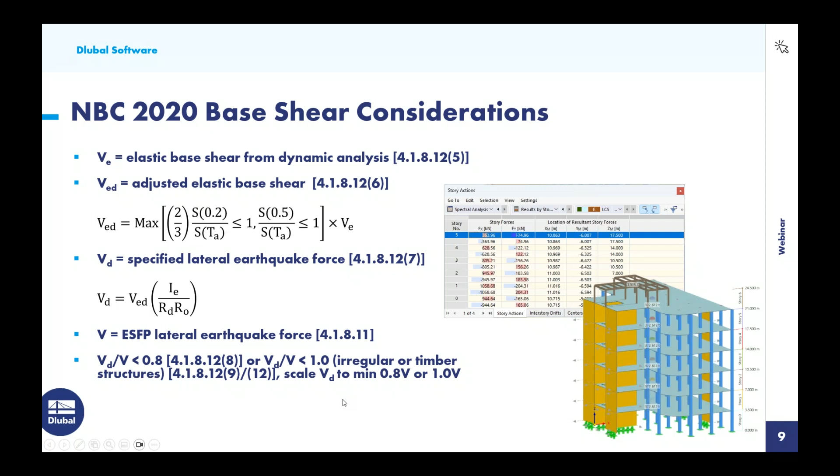So the question might be, well, with all of these different base shears, what is RFEM giving me? So on this next slide, let us talk about the result output from the response spectrum analysis. If you remember, when we created that response spectrum analysis definition type according to the NBC, we had set the type to design spectrum.

And with the output that we have seen up until this point in time in our RFEM example, this is actually giving us our base shear for the specified lateral earthquake force V sub D set forth in Article 4.1.8.12.7. However, I do want to clarify it does not include that additional factor from 4.1.8.12.6. Again, there is just specific criteria on when that factor needs to be applied versus when it should not be applied. So we have left that up to the user.

However, it does include the factor I sub E over RD times RO from 4.1.8.12.7. So this is ultimately the information that we're getting in the base shear building model add-on results with the design spectrum type.

If you also remember, I had mentioned there is the elastic spectrum type that we haven't seen so far, but that is the additional option within the drop-down. This is going to give us the elastic base shear, V sub E from 4.1.8.12.5. So it includes no factors at all, including that I sub E over RD times RO.

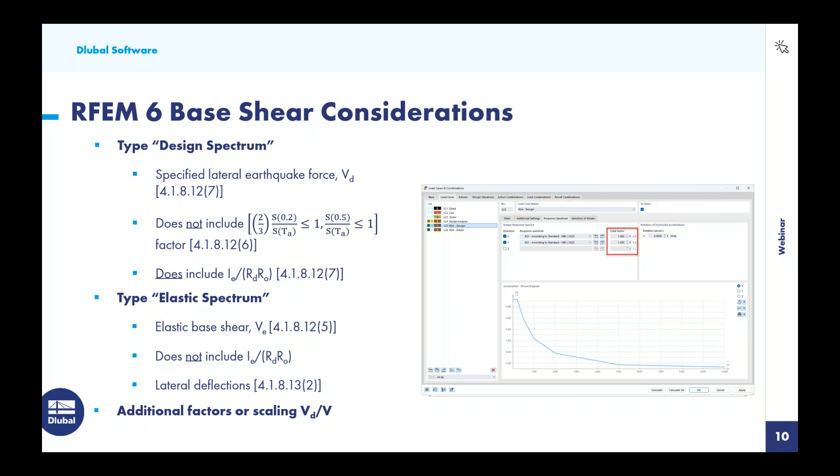So let us go back to RFEM here, and I'll quickly show you how we can consider that elastic design spectrum. So going to our load cases and combinations, I'm going to make a complete copy of load case 5 here. And instead of my response spectrum analysis for design, I'm going to rename this to elastic. Now, all of the previous settings are also copied over, so I don't need to make any modifications to this.

But under the response spectrum type, I'm going to edit the definition type here to also create an exact copy of my existing response spectrum definition. And up at the top, I'm going to modify this to elastic. Now notice that a lot of the input criteria is now gone, and that's again because we're not considering those additional factors here with our response spectrum analysis with the type elastic.

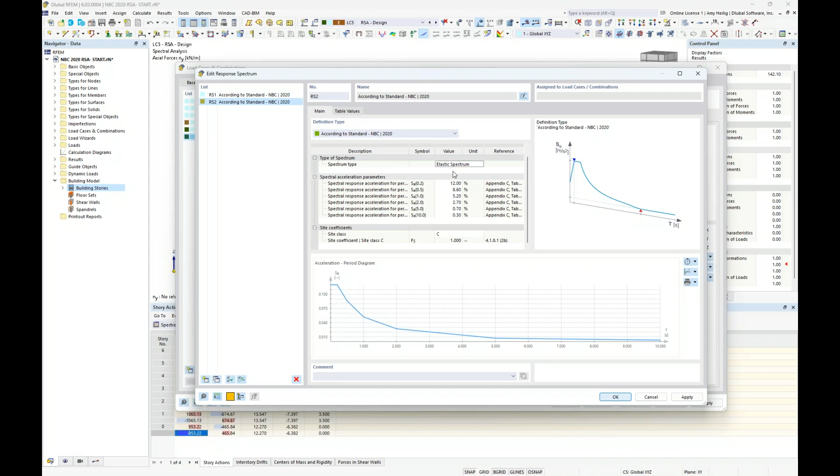So now that we have this second definition type here for elastic, I can simply select it in my drop-down box. And we would rerun the calculation. We would take a look at the building model results, and in particular, the drift, to make sure that our drift is limited to what Article 4.1.8.13 has set forth. No need to run that calculation now. It's really the exact same workflow. I just wanted to show you how we can essentially consider that elastic response spectrum analysis.

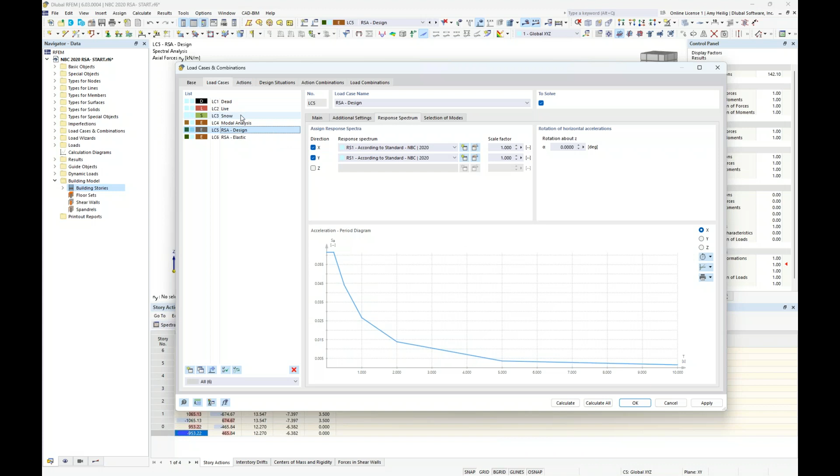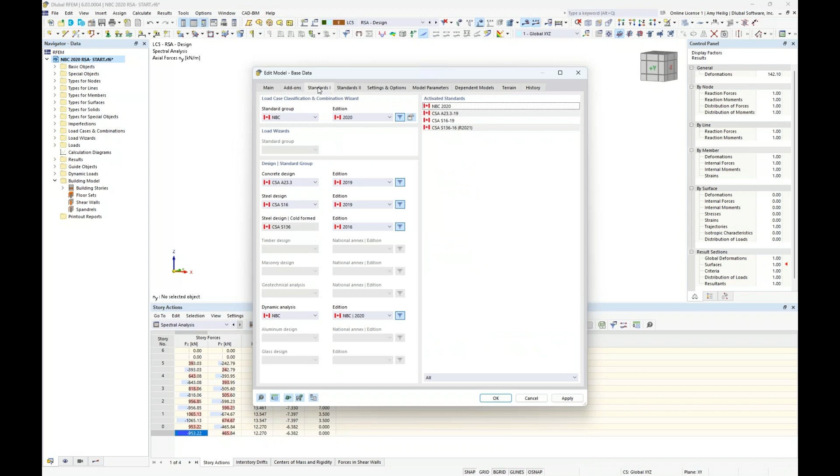Now, the final topic to cover is we now have our earthquake loads from this design response spectrum. How do we combine this with the other load cases such as dead, live, snow, or perhaps we have additional lateral loads like wind analysis? So if I go back to my base data, we probably would carry out the design here utilizing the concrete design add-on or the steel design add-on. Notice we have timber for CLT structures, aluminum, we have cold form steel, whatever it may be. And under the third tab now, we get some additional options to carry out this design specific to the CSA standards for both concrete and steel.

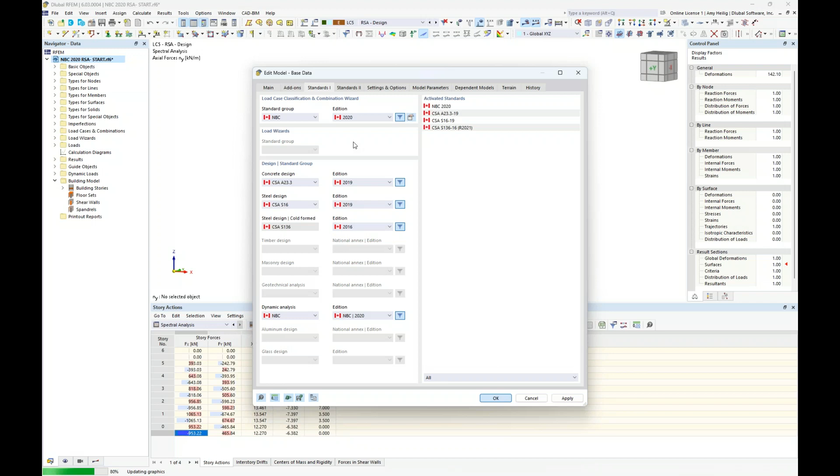But for today, I just want to briefly show that we would probably, again, carry out the design of our structure utilizing these design add-ons. Well, if we go back to the load cases and combinations, and we take a look at the design situations. Again, I had mentioned that the program will automatically create these two design situations, and we'll activate them for the ultimate limit state and serviceability limit state that we'll eventually use within the concrete and steel design add-ons. That's why they're both checked here.

If we take a look at the load combinations that are generated from these two design situations, you'll see here that I don't see earthquake listed at all.

And the reason why is because these load combinations are being generated according to a nonlinear second order analysis to consider those P-delta effects. But we know that we cannot simply add the earthquake loads to these additional load cases using superposition, because we can't combine second order effects and just add them together like P-delta.

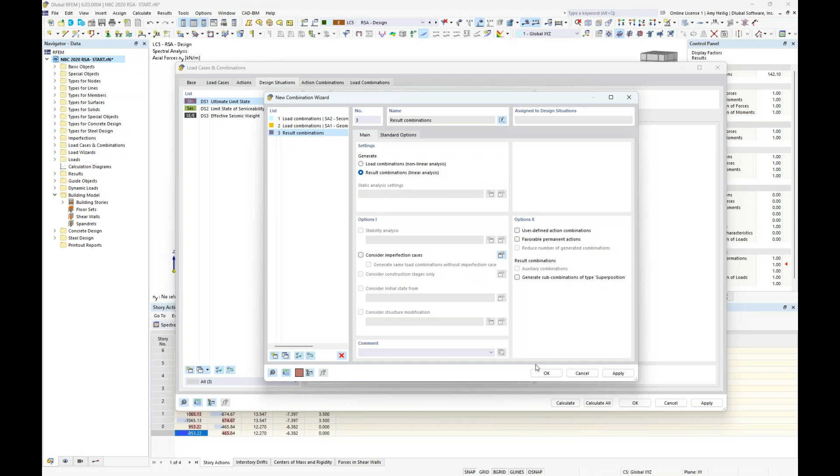So instead, we want to come in here for the ultimate limit state and go ahead and edit these settings here. Again, the default is set to second order analysis, but we're going to create a new definition type. And instead, we want to combine these earthquake results in a linear analysis using result combinations. So once we have selected this new definition type, we want to additionally select it here within our drop-down box for that ultimate limit state.

And now we get a new tab called result combinations. And sure enough, we see here dead, live, and snow, but we also see that earthquake load listed here from our response spectra analysis and the design. Notice also the sub-results. Currently, the scaled sums envelope will again reference the envelope solution from the 100/30% rule, 100% in the X, 30% in the Y. But if we wanted to consider one of these other scenarios, we could do so within the dropdown. But the default scaled sums envelope will take the max and min results here for this result combination.

We also see a second result combination with our elastic response spectrum analysis. And for this, we actually refer back to the NBC Commentary 2015, and in particular, Appendix J, Note 111. And the commentary tells us that earthquake loads are considered rare. So there are no general requirements for SLS design when considering earthquake. Rather, we take a look at the specific elastic response spectrum analysis to make sure that our drifts, in particular under only earthquake loads, are limited according to what the code has said. Therefore, I really don't need to include this in my load combinations as well.

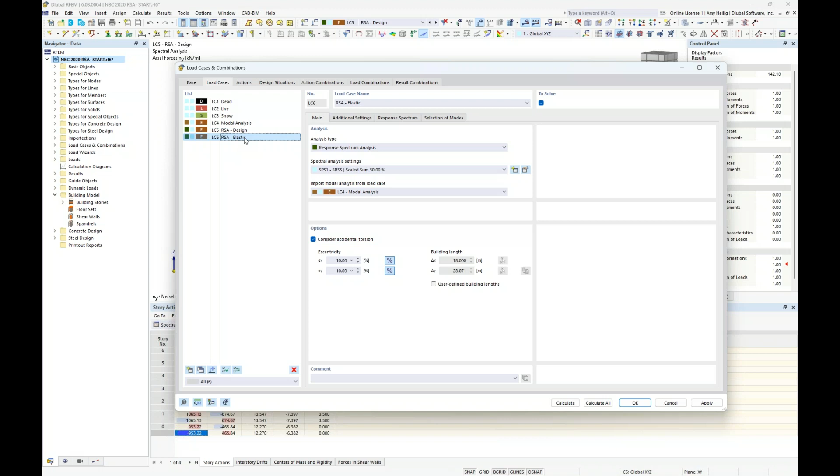So I certainly could go back to the result combination and just uncheck the solve, but probably the better option under actions is you'll see here a separate action category assigned to my response spectrum for the elastic type. I can uncheck the active here. And now under my result combinations, we only have a single result combination considering that design response spectrum analysis.

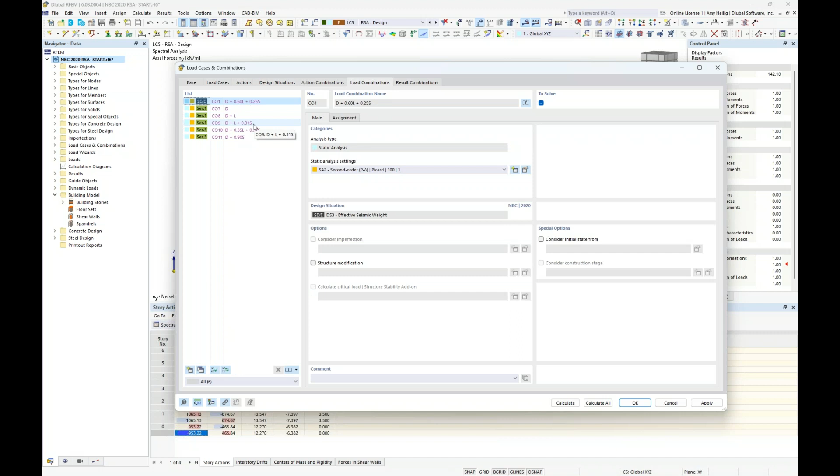When it comes to SLS design, we see here our design situation for SLS design. This is set according to second order. That's probably fine because we are able to combine now for our load combinations for SLS for dead, live, and snow. But again, for the ultimate limit state or ULS design, we can't do so with a response spectrum analysis. We must combine them linearly.

Okay, so that will conclude our presentation today.